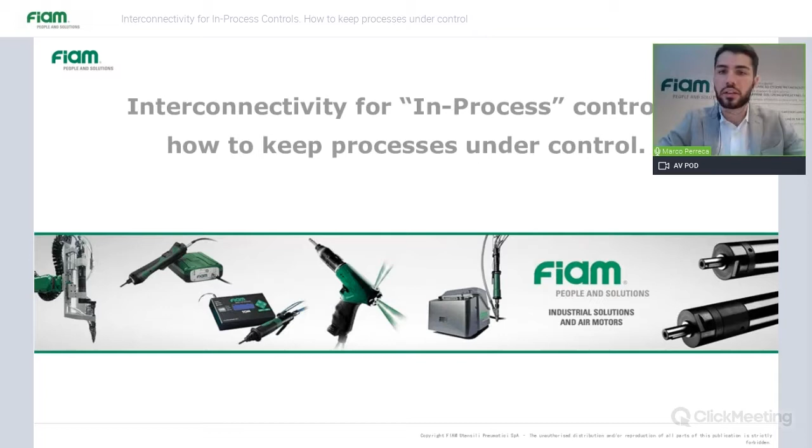Okay, so first of all, I hope that everything is fine with you with this global situation. We know that we are all struggling, but it seems that everything is turning. The situation is getting better, so I hope that all of you are okay and your companies are running fine.

For those who don't know me, I'm Marco Perreca, and I'm the sales area manager of the FIAM team. I work globally with our partners in order to supply our customers technical service and sales service for our tightening solutions, as well as other products like air motors and surface treatment tools.

FIAM, for those who don't know us, is a 70-year-old company, so it has a few more years than me. There are 90 employees. The company is really focused on research and development and on manufacturing, so most of the employees are focused there. We have a global presence through our partners. I call them partners and not resellers or distributors, because they are involved in our processes as well. They provide technical service together with us in addition to just sales.

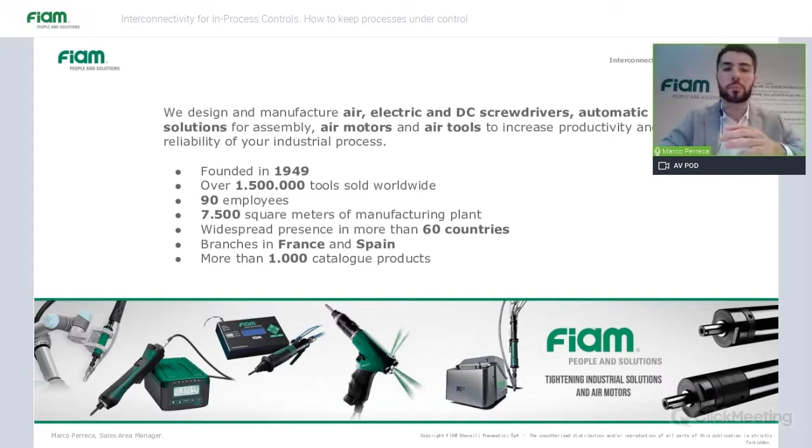Okay. FIAM is present all over the world through these partners, while in France, Spain, and Italy we work directly with our customers through a sales team. So we also have our employees in France and Spain. I would like to show you where we usually work. Here you have some of our customers and the main fields where we work.

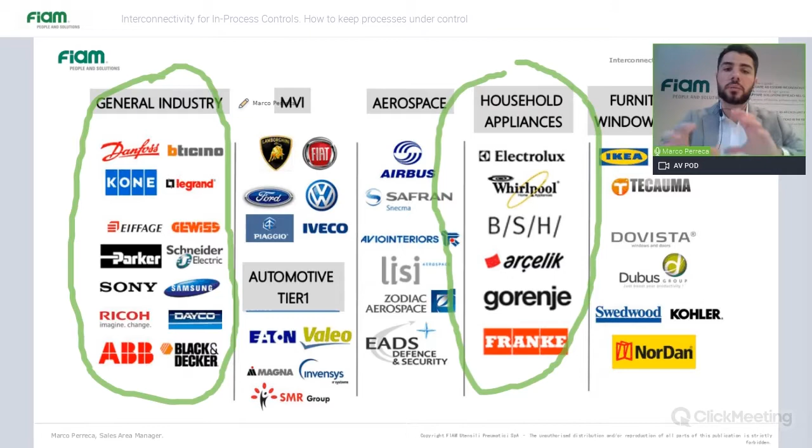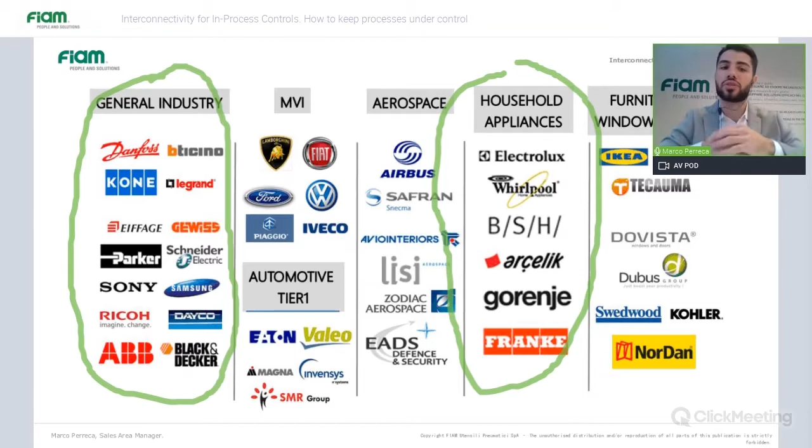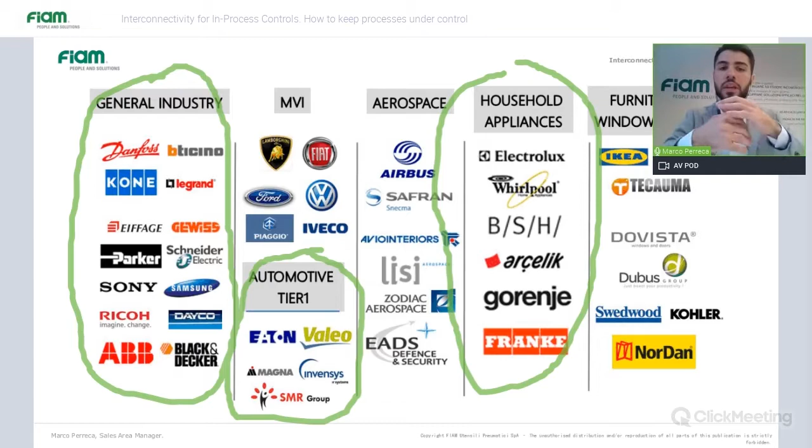The most important fields for us, in terms of amount of sales and experience, are household appliances, as well as general industry. Here you can recognize big names, especially in the electronics field. We have been working a lot in this field in the past few years after the release of our new electric screwdrivers range. Another important sector for us is automotive tier one, where the technology demand is higher, and they also push us to improve ourselves. Okay.

Then going straight to the point, to the title of this webinar, these are the topics that we'll address during the meeting. The efficiency of the production will be the key point, as well as the reduction of its cycle times. When it comes to cycles, the most important things are improving speed and quality, so reducing wastage and avoiding errors. We will also see some of the tools available in the market to prevent errors and improve the process and its quality.

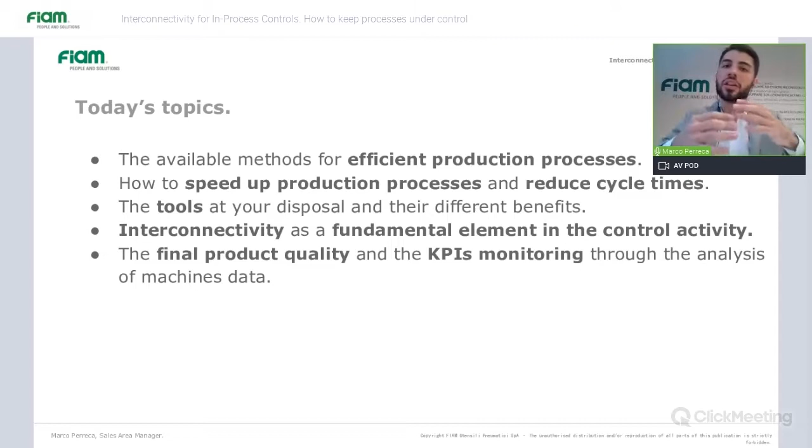We will also discuss the interconnectivity of this system with the factory, so all the data exchange and data management in the factories, mostly connected to assembly. I think it's a really important topic, especially in this period. And at the end, we will see the KPIs that should be monitored in order to check if the process is running correctly and if there is something that can be improved.

The cornerstones of the effectiveness of the production process are, as I told you earlier, increasing efficiency as well as reducing lead time. There is another point that I think is very important: one-piece flow production. We called it like this, but basically we are talking about flexibility.

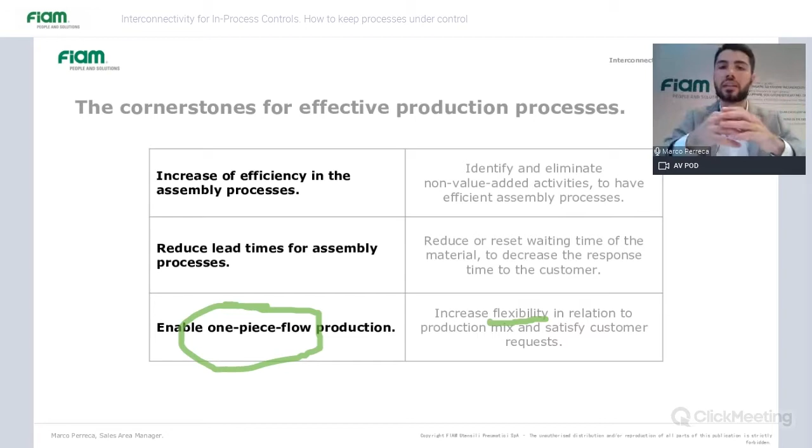Especially in this period, when all the companies started again after the coronavirus and all the stops we had, we started with high volumes and many different products to be assembled, and this could create problems. So we should find a way to be more flexible and adapt our production very fast to meet customer demand, going from one batch of products to another quickly and effectively, avoiding errors. Okay.

The focus will be in-process control. To talk about in-process control, we should also talk about post-process control, because we have to see the differences. Here we highlighted the advantages of in-process control, and we will see later which KPIs should be taken into account. The most important advantage of in-process control is intercepting all the faults, avoiding wastage. This keeps costs lower and also lead time lower.

As I told you, especially in this period where we are all running to meet the request of the customers, all the companies that I'm talking with in this period are running to, let's say, ship all the orders in time, and it's not easy. Just one error could cause a big delay in the whole production. So this is a really important point, to avoid that this happens.

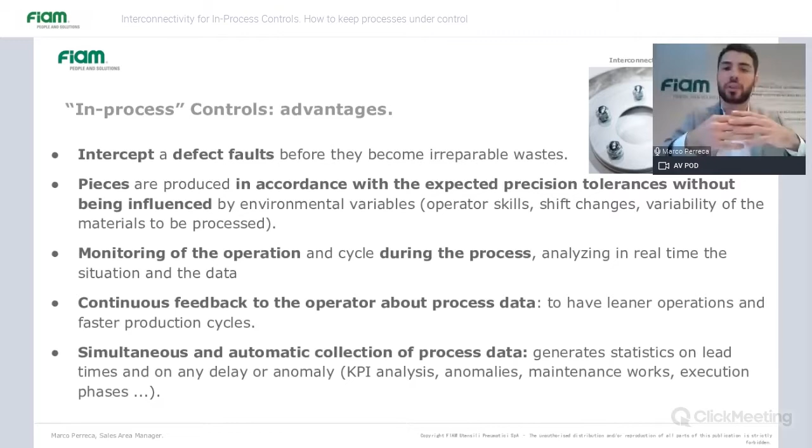Talking about process control and monitoring, I would like to explain what we mean by monitoring or by control. Basically, monitoring is the in-time control that we do. So it's checking what is happening and tracing all these things. Control is, let's say, a wider view of the process. So we will analyze the whole process, check all the data, and try to improve this process. So let's say that with monitoring, we just see if a problem occurs. With control, we will avoid that these problems occur.

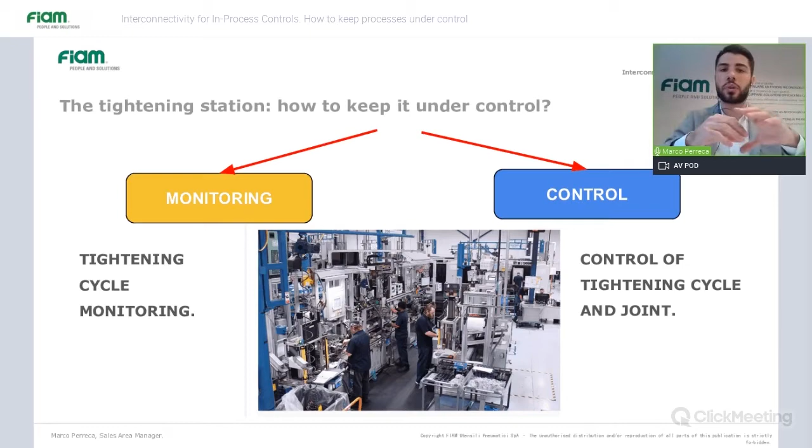Okay, talking about tightening specifically, we will make some real examples. With monitoring, we will just check if we reach the torque, if the position is correct, and give feedback to the operator. With control, we avoid that the tightening is not made in the proper sequence. We set the correct program with the correct sequence, the correct torque, the correct angle, in order to avoid that a problem could occur.

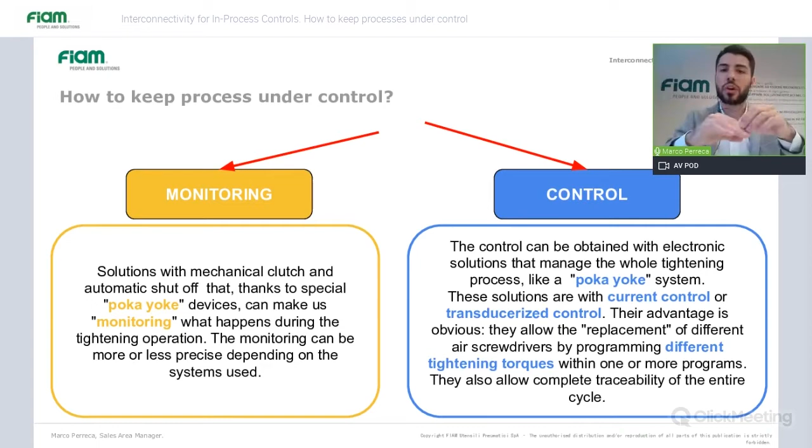So with tightening monitoring, as I told you, we check if the torque control is on. We verify if everything was correct, so time, torque, and position were correct. And we also advise the operator if something happened, so if a problem appeared.

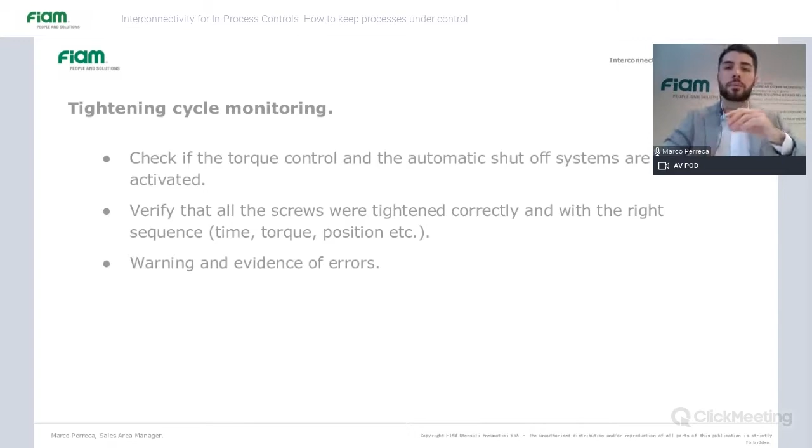Then we also talked about the poka-yoke system. I don't want to mention the name of the Japanese engineer because I don't want to be offensive with my pronunciation. But the father of this system is a Japanese engineer who used to work for Toyota and spent a lot of time looking for a way to reduce, and let's say turn to zero, all the faults and all the errors that could occur during the production process. He did this using devices and systems in order to prevent the operator from even making the mistake.

And that's the point. Avoiding that something can occur, not just recognizing the problem. It's working a step before, so avoiding that anything happens. So poka-yoke means stupid-proof, idiot-proof system, because the operator doesn't have to pay attention to avoid making a mistake. The mistake can't even happen. So that's the point.

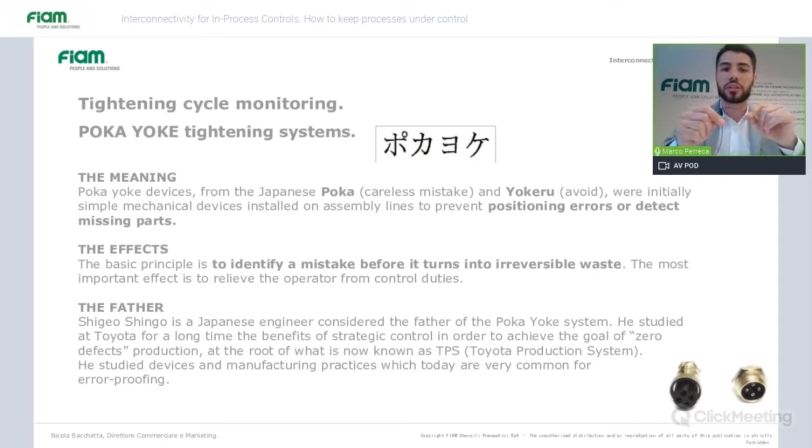And talking about these poka-yoke devices, they assist the operator, and you know, when it comes to tightening cycles, I take the tightening cycle because it's the closest to me, and also it's a very basic operation. But when you have to tighten a screw, let's say, every 5 seconds, at the end of the shift, making the calculation, it will be more or less 5,000 screws for every shift.

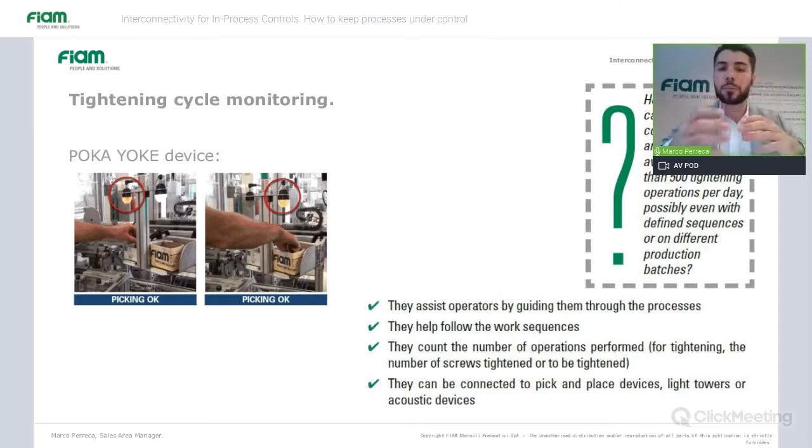After an hour, let's say the operator is fresh and can pay attention to all the things that happen during the assembly process. But after 5, 6, 7 hours, when he's tired and he has done so many screws, so many tightenings, so many operations, it's more difficult to pay attention to all the details. So we can't just put all the responsibility on him. He should be helped by systems, by these poka-yoke systems. Okay.

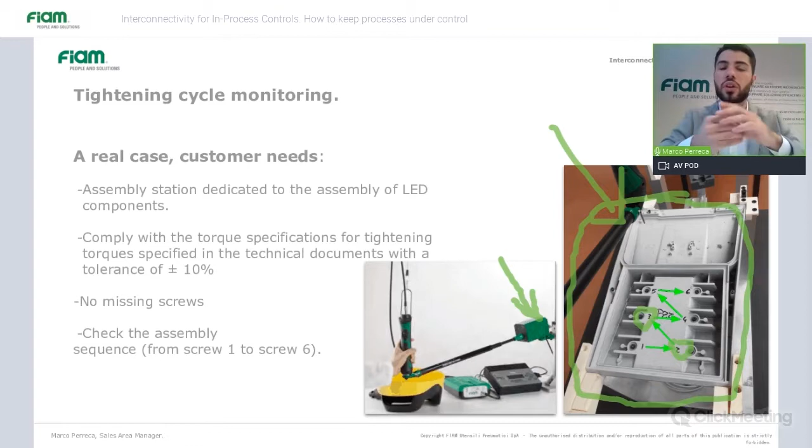So here there were no high requirements of torque accuracy, but the most important thing was that every screw was tightened correctly at the correct torque and in the correct sequence. And this system allowed them to avoid all the problems related to the torque variation and to not following the correct sequence.

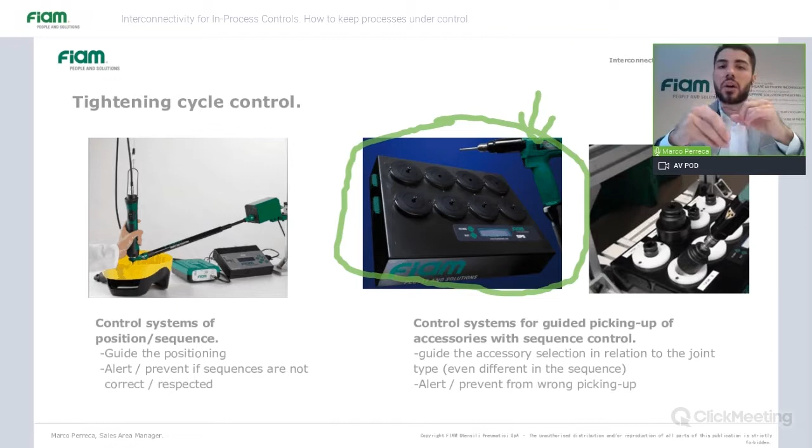I've talked about just one system which allows monitoring, but also prevents problems from occurring. We have other systems, also more advanced. Here, for instance, we have a socket program selector, which combined with a DC screwdriver or an electronic screwdriver, makes it possible to automatically call the right program. So it means that the screwdriver selects automatically how to tighten that component and the sequence that should be done.

So this means that all the problems related to a mistake of the operator, who could be tired, could be thinking about another process of the assembly, are avoided. This system prevents him from taking the wrong screwdriver or tightening to the wrong torque. So this is very important. Also here we have the socket tray, which will light up the correct socket so that the operator knows what to pick up.

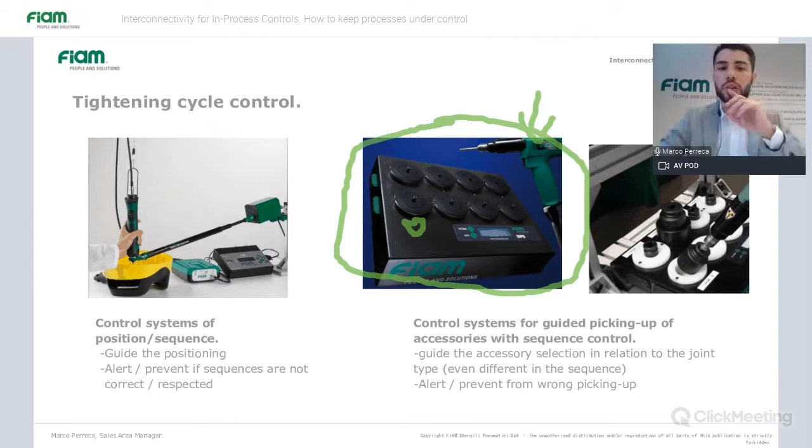Then going to another example using these two devices: the positioning control arm and the socket program selector combined with a transducerized tool, which allows you to reach higher accuracy. We supplied a customer that, if I remember, makes components for showers. They needed to follow a sequence with high accuracy and with two different torques, because there was a plastic component positioned on a stainless steel or an aluminum plate. The problem was that there were two different torques, and the torque needed really high accuracy.

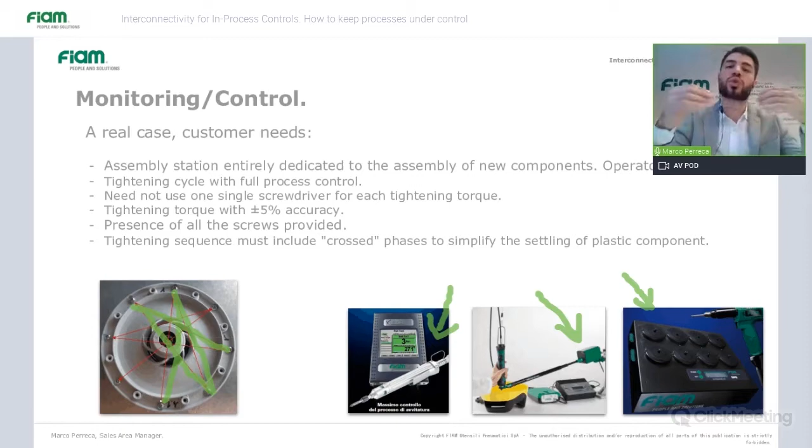So we supplied the positioning monitoring system to follow this sequence. Then we also supplied the socket program selector in order to call the right program on the basis of the plate that was there. The customer also asked us for full traceability of the process. What does it mean? That they wanted to store all the tightening data. And this is another example of storing the tightening data, communicating it, and having high accuracy.

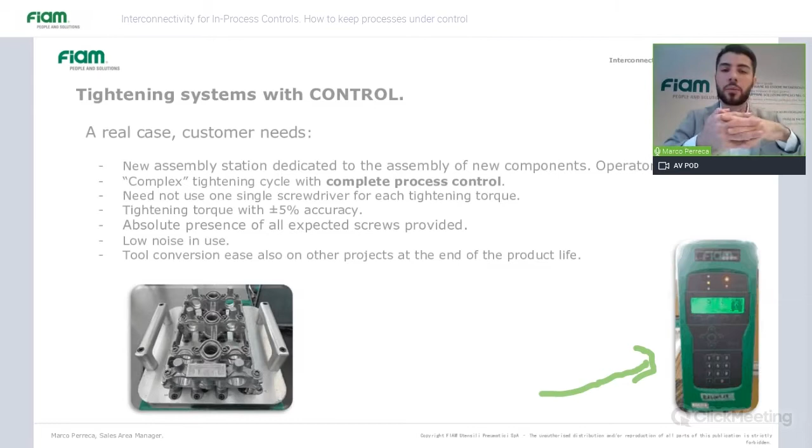Here we used a very advanced system in order to supply the correct accuracy. The customer asked for plus or minus 5%. The main requirement here was a complex tightening process: there was a positioning of the component, a pre-assembly, then another tightening to be done to a higher torque. If I remember, it was 5 Newton meters and 9 Newton meters, with high accuracy. So here we needed a sequence of two programs, storing all the information and combining it with the other information of the production process.

Okay, then I talked to you about the transducerized tool, the electronic tool, but what do I mean by electronic tool? Basically we have two different technologies. The first one is transducerized tools. We call them torque and angle control, but actually torque and angle control is done also with the other technology. The most important thing here is that there is a transducer which controls the torque during the tightening, and another sensor that detects the angle, and this allows you to have really good accuracy and to know exactly what happened during the tightening process.

Then there is another, let's say, more cost-effective solution, which is the current control solution. Also here, you can export all the data, control the angle, control the torque. It's just a different way to do these two activities. Basically, the torque is calculated by checking the current absorbed by the electric motor inside the screwdriver. This gives you the torque data, and then there is a real sensor that controls the angle. So also here you can set different strategies, different programs, and export all this information to the factory system.

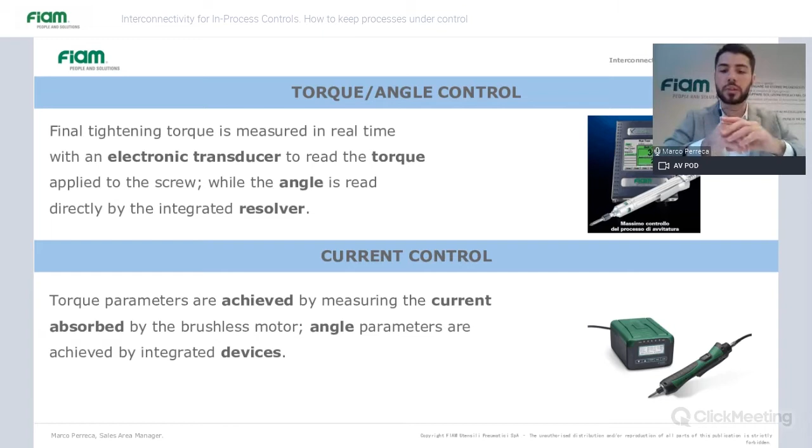We call them smart tools, but what we mean by smart is that it's possible to set different parameters: torque, angle, speed, time, all the sequences. But another important feature is that, as in the case I told you earlier where we needed two different torques, with one single screwdriver you can do more operations on different components, when in the past, with a pneumatic screwdriver, you needed several tools. So this is a great advantage of these tools.

Then setting different programs is really important, but what is really important is also selecting the right program and making the screwdriver interface with the PLC of the line, with the laptop of the line, and with all the devices connected to the production system.

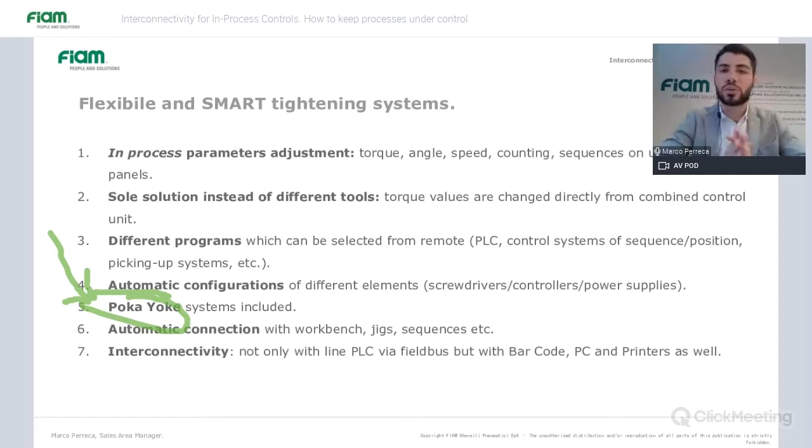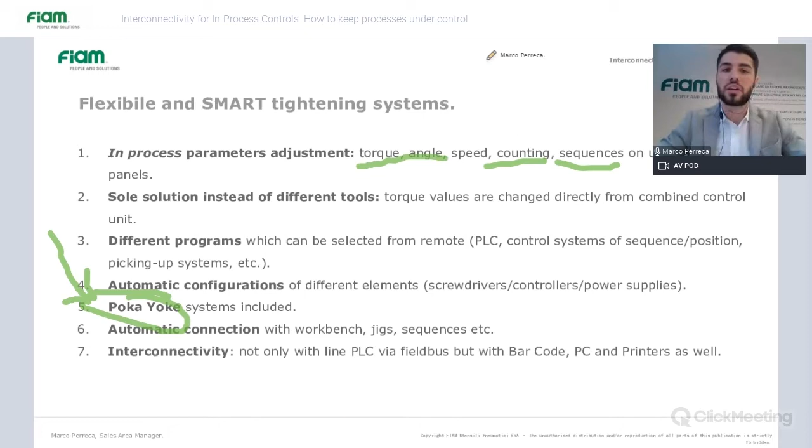Then we discussed poka-yoke earlier. Here, these tools are basically poka-yoke tools because they control the sequence, they count the screws, they automatically set the torque and the angle. So basically, here we have a real poka-yoke system that could be connected to other poka-yoke systems, as we showed earlier when we discussed the tightening positioning system or the socket program selector.

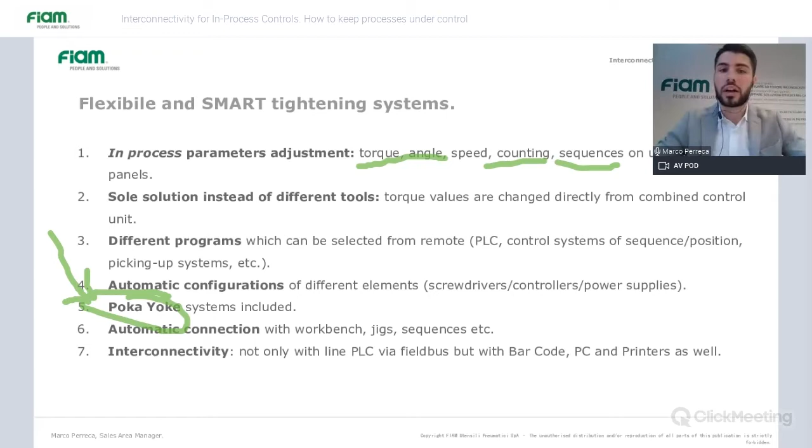Then we also discussed connecting with other devices, so interconnectivity. That is a really important thing that we will see later with the slides. Here we have all the controls that you can do with these smart tools, so with electronic tools. Basically, here we have all the torque control strategies, as it has always happened since there is this kind of control. Torque control is really important, and is what most companies are aiming for.

With these kinds of tools, we can combine this information with other information like the time, like the angle, and combine these two parameters in order to see if everything is working correctly, and that the final result is what we are aiming for. But these tools also allow you to have angle control or time control. So based on these two parameters, we make the tightening.

And this could be done, for instance, to have a depth control, or to tighten the screw to a certain point. That is really important, and in some cases is the demand from the customer.

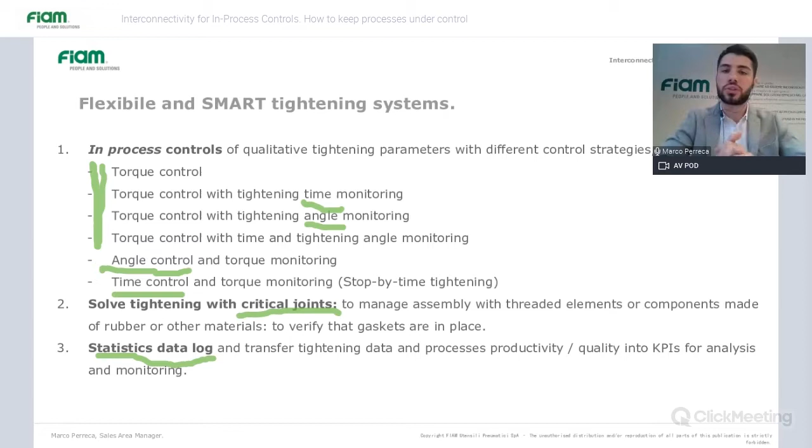These tools also allow you to make statistics and collect all the information. Collecting the information is important to transmit it and analyze the processes, as we discussed earlier. Analyzing the process is the start in order to improve the process, because with all the data we can analyze and understand where we can improve ourselves.

This is the basis for Industry 4.0, because Industry 4.0 promotes an environment where everything is connected, where all the information is traced, and based on the big data, we will improve our processes, aiming for a faster lead time, lower errors, lower wastage, and this is the real improvement that you will see by collecting the data. Industry 4.0 is a term that in the past years we've talked about so much.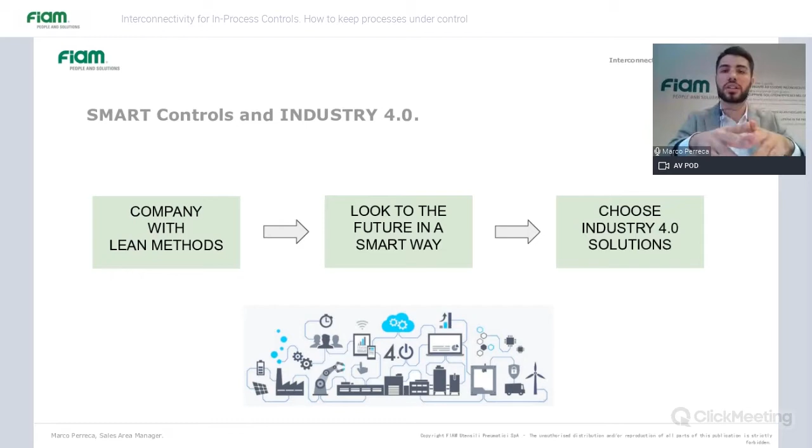I think all the companies have talked about it so much. I think that for the future it will get more and more important to store all the information, trace it and communicate it in a proper way. So this is what we call interconnectivity, and as I told you, the use of this data and the analysis is the most important thing.

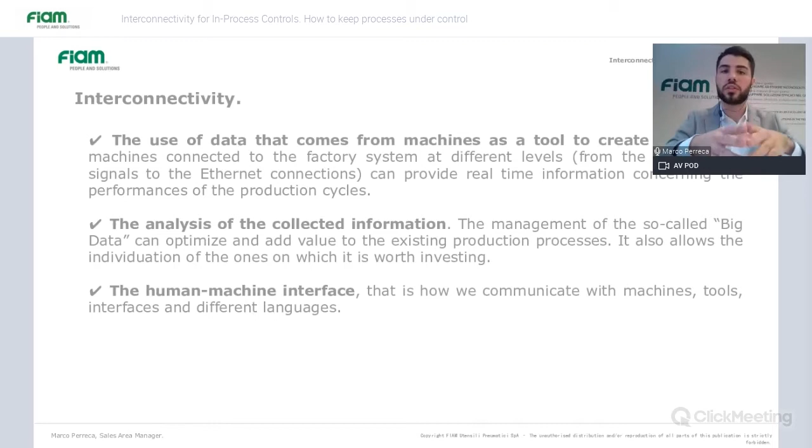In addition, the human-machine interface: communicating all this information to the operator, to the people in the company in the proper way, is the most important thing, to be effective in the communication between the system and the operator.

Okay, so in-process and post-process control. I would like to discuss this topic, also related to the joint, to the real tightening. So the in-process control is done during the process, as the word itself says, and allows you to control that everything is working fine, and this measurement is not affected by external factors. We will see later, but there will be a transducer in between the screwdriver and the component.

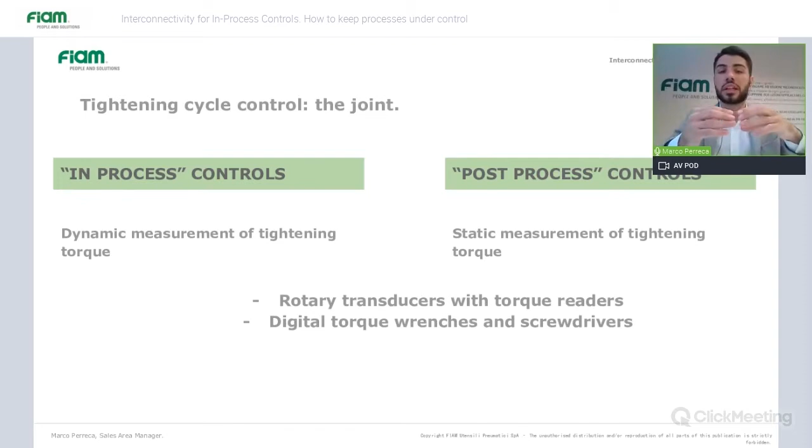The post-process controls typically require more effort if something occurs, because if you discover it when you're doing the tightening, it's much easier to correct. When everything is done and you check the quality with a post-process control, it's much tougher. And here, this measurement is also affected by the skills of the operator.

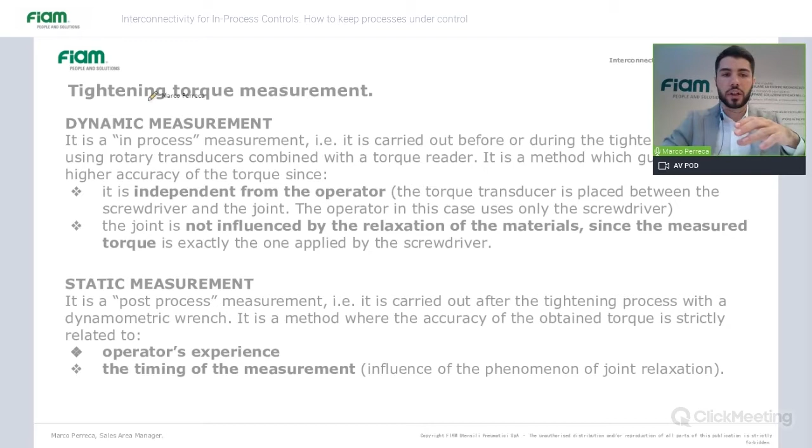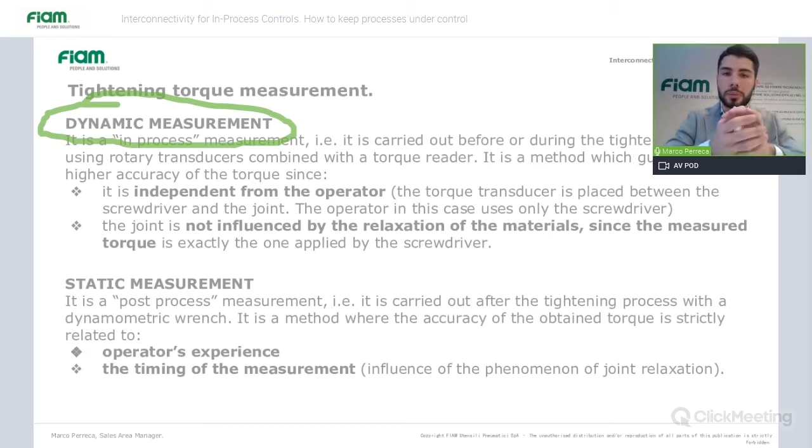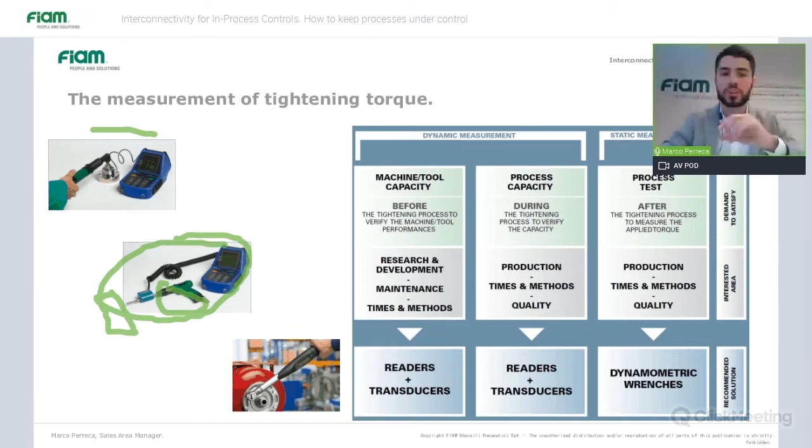So the dynamic measurement is the in-process control that I talked about earlier. Basically, there is a transducer in between the screwdriver and the component. Then there is also the static measurement. Here there are two ways of static measurement. The first one is a measurement on a joint simulator.

So basically, the screwdriver is tested before using it on the real components, and here the accuracy is quite good, because there is a transducer. The operator is not required to have such high skills. But the point here is that you are not tightening on the component, so you're not taking into account many factors, and that's the problem.

The other static control, the after-process control, can be done with the dynamometric wrench, the torque wrench. Here, what is the problem? Basically, when you make the wrench rotate, you will apply additional torque. You will falsify, let's say, the measurement of the tightening.

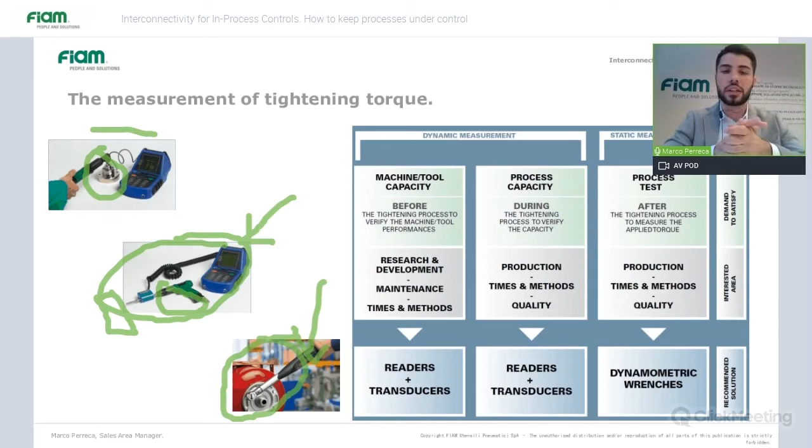So that is a problem. There are many factors that affect this kind of measurement. When you do the measurement with a transducer, a dynamic transducer, it's much more effective and reliable, let's say.

Okay. Talking about accuracy, I think it's very important also to mention some of the indicators that should be watched when we talk about tightening.

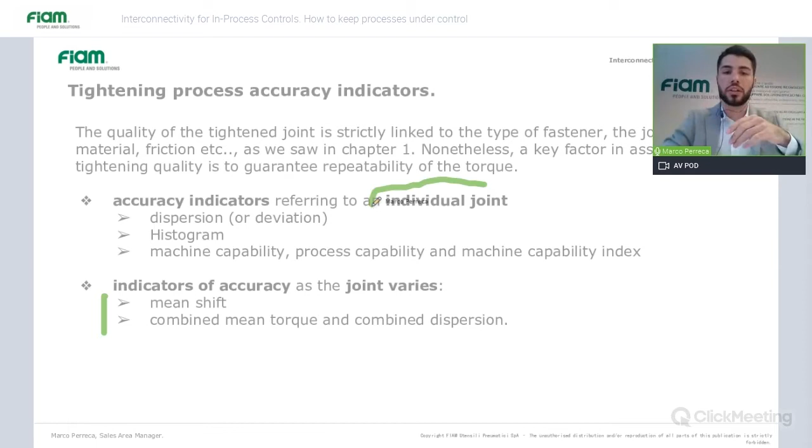Okay. Then we have the individual joint indicators. The first one is the dispersion, and then its histogram. Basically, the histogram is a representation of this dispersion. We will check how the tightening will be distributed in a range, and here we could have different torque values, and we will see what torque values the screwdriver will provide.

And then we will put in relation this information with the value that we measure during our test. So the dispersion is basically the index that says how far our tightening is from what the screwdriver should supply, let's say.

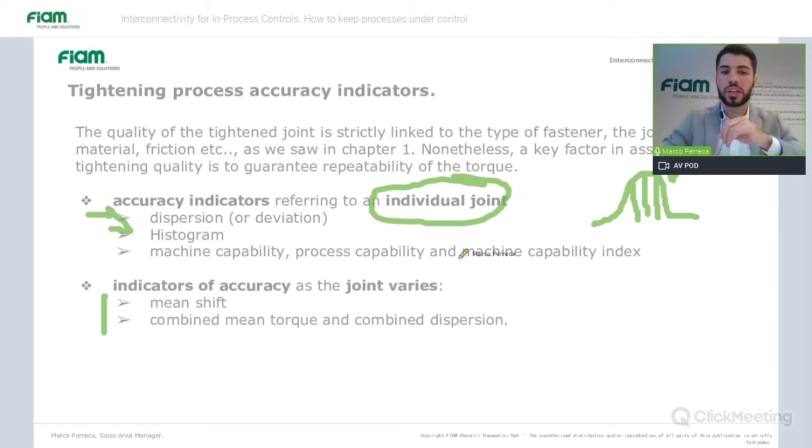Then we also have the machine capability, the process capability, and the machine capability index. Basically, the machine capability is the factor that tells you if the screwdriver is doing its job correctly. This test is made in a laboratory, so it doesn't take into account all the variability, all the environmental factors that could affect the tightening.

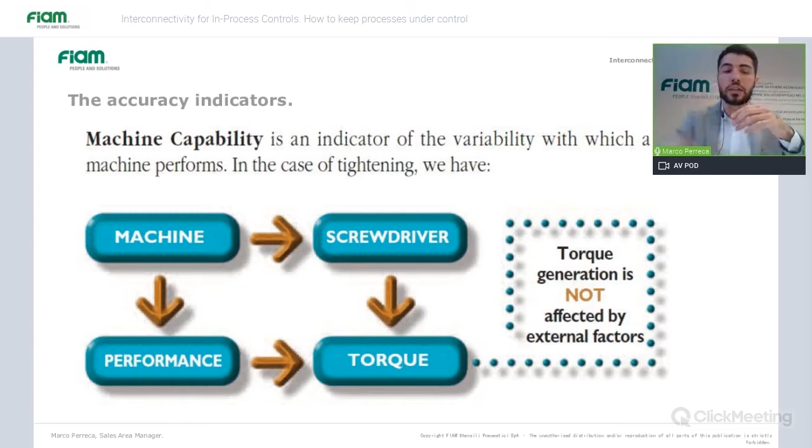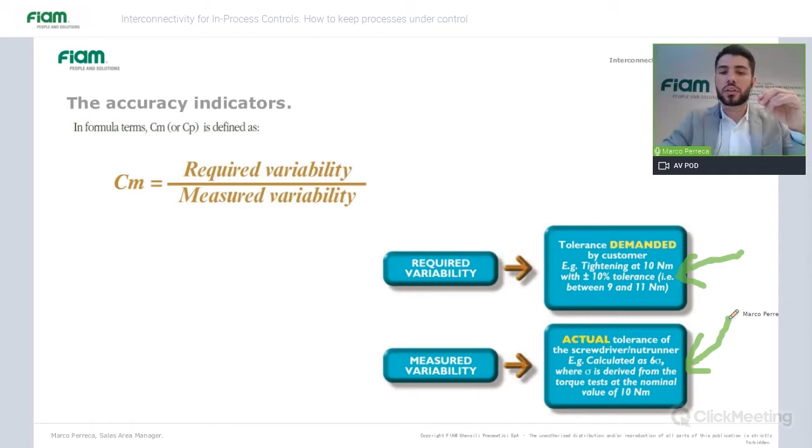And it takes into account the requirements of the customer, for instance the tolerance that the customer wants with the performance of the screwdriver.

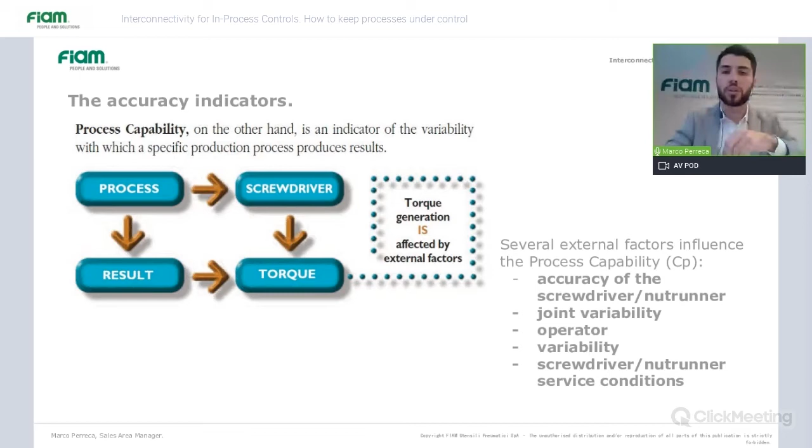Then a way to be more effective and look at the whole tightening process, taking into account also all the external factors, is the process capability. This test is made directly in production or with the components of the customer. It takes into account also the wear of the screwdriver, and this allows you to have a more precise indication of the accuracy of the screwdriver in your assembly process. So this is more focused on your assembly process.

Then we have also the machine capability index. If we talk about machine capability and machine capability index, the difference is that the machine capability talks about repeatability, so it tells you that the screwdriver will always apply the same torque. The machine capability index will tell you that the screwdriver will always apply the same torque at the level that you require. So if the customer asks for 10 Newton meters and you always supply 13, the screwdriver has good repeatability, but is not accurate.

When you always apply 10 Newton meters to the component, and that is the target of the customer, there you have accuracy, and this information is given by the machine capability index. Okay.

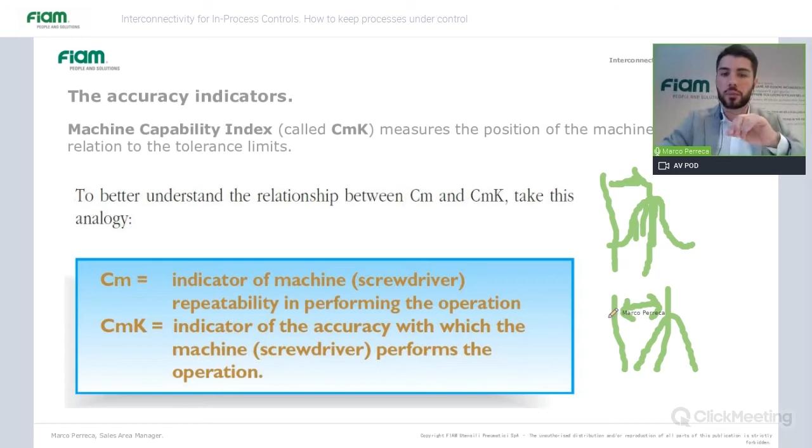Then the last topic that I would like to address with you is this one. When we talk about accuracy, please pay attention to what they tell you, because very often screwdriver manufacturers give you information about the accuracy, telling you only the percentage of the accuracy, but they are not referring to any machine capability.

The problem is that you don't know if the screwdriver is accurate or not, because you don't know if the screwdriver is working properly. As we discussed earlier, the CM indicates that your screwdriver is working properly. So if you don't have 1.33 as a CM, or even higher, because maybe the requirement is higher. In the automotive industry, probably they will ask for a higher CM, so they will need higher repeatability. If they don't tell you what CM the percentage they communicate is related to, it means basically nothing.

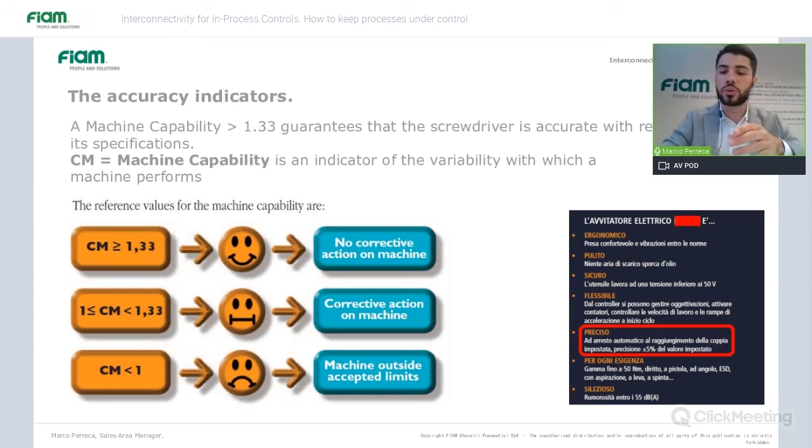When it comes to the accuracy, if we refer to the CM of 1.33, talking about the different technologies that we saw earlier, the transducerized tool has an accuracy, if well programmed, of 1 to 3%. What I mean by well programmed: when you have a car, the car manufacturer can tell you that the car will stop in 50 meters, but it stops at 50 meters only if you are going at 50 kilometers per hour, not at 100.

The same thing here. You will achieve this accuracy only if the screwdriver is set correctly with the correct speed, the downshift, and all the advanced parameters that will allow you to achieve this result. If the programming is not accurate, it's impossible to achieve good results, even with the most advanced tool in the market. So this is a really important point.

And the same thing is with current control tools, where the accuracy is slightly lower. Obviously, we are talking about different levels of tools, but with current control we are between 5 and 7%. Also here, the program that you set on the control unit is very important. And at the end, we have the mechanical clutch screwdrivers, which could be electric or air-driven, and here we have an accuracy of 10%.